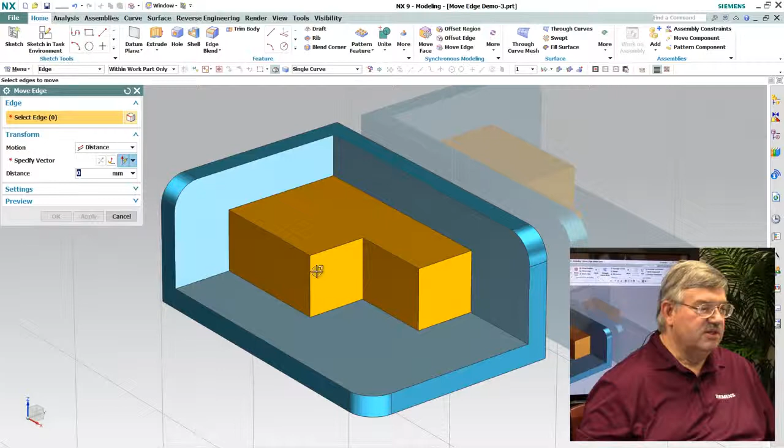And so what I need to do is now go in and use the new function of move an edge. So I pick the edge and I say 30 millimeters, and now I've moved the face at an angle. Again, the face has been moved at an angle, but I didn't use an angular measurement. I actually offset the edge using this new function.

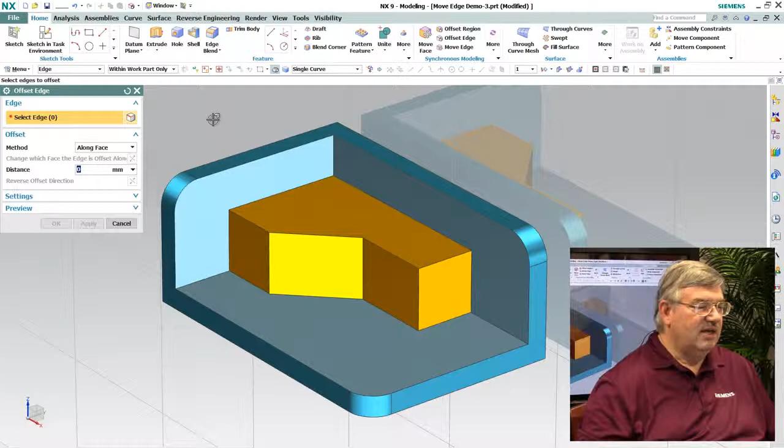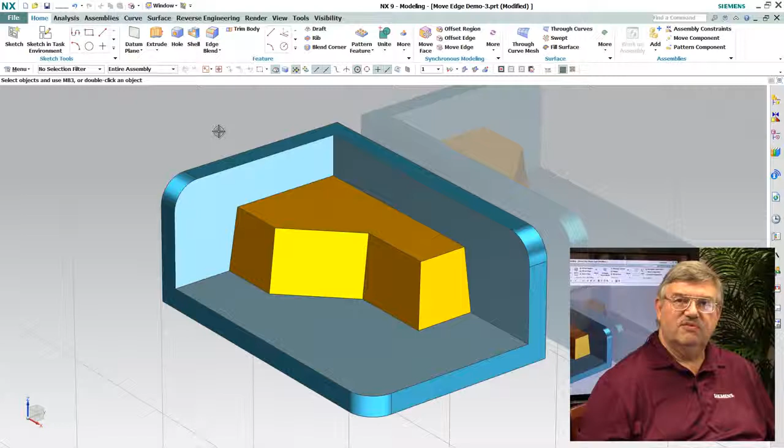And we can do the same thing. For example, somebody may say I need to add a draft to this model, but again, he doesn't have the angle, but he knows what the setback is. So there's an additional function called offset edge, where I can take a series of edges and offset it. For example, let's say 5 millimeters. Again, I don't know the angle, but I do know that 5 millimeters is what the specification said. So again, a perfectly valid way of adding draft to a model without knowing what the angle is.

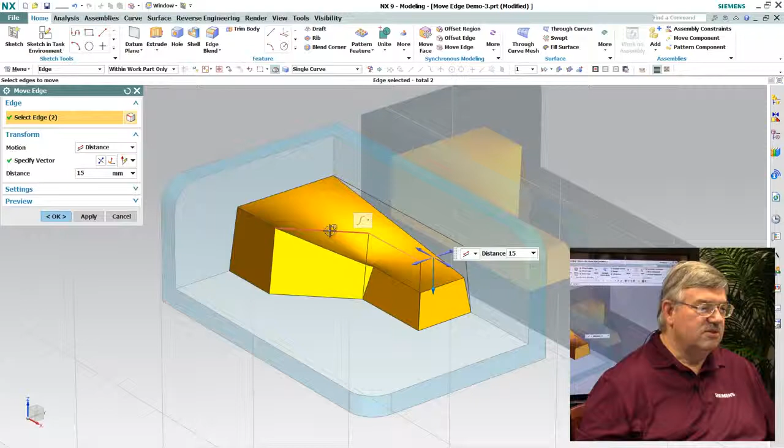Now, there are some interesting things you can do with move edge, because what you've seen so far is pretty straightforward, but I could also come in here, grab an edge, for example, and move it in this manner. And picking up the additional edges here of this face, I've actually created a very complex shaped face now on this model. And again, I could move it up and down to change the height of it.

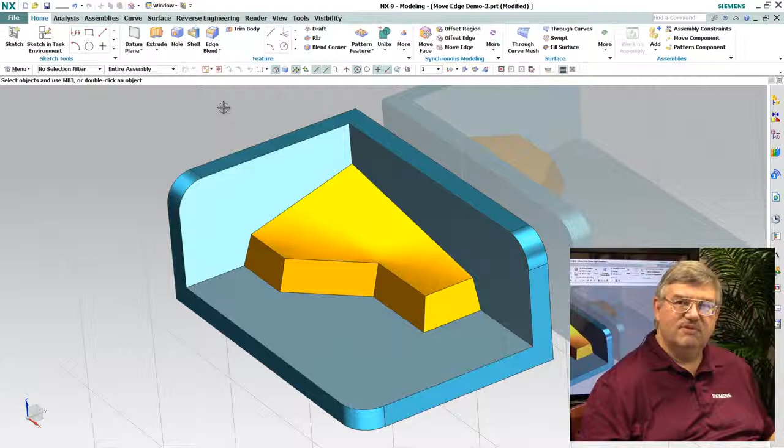Again, a perfectly valid model, but one that would be very difficult to model even with the advanced surfacing techniques that NX offers you. This is really a very easy to understand and straightforward way of making that complex shape.

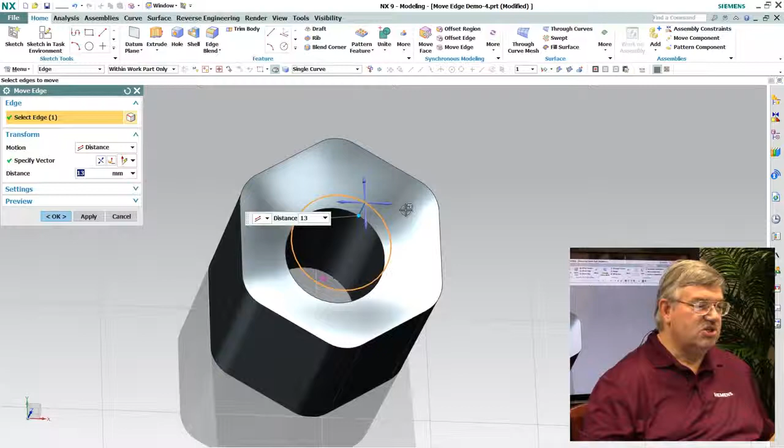Now this actually leads us to another interesting case. For example, I have this part here, a very simple part, and I'd like to apply a shape to the top of this face here. I can simply come in here, grab a hold of this edge, and just simply move it down, creating sort of a very complex shaped depression in the top of this part, simply by just moving that edge down.

Again, yes, there probably are some surface modeling techniques that one could have used, but they would have been much more complex, required many more steps, and multiple feature operations, where here I can just do it in a single operation. Anyway, thank you very much.